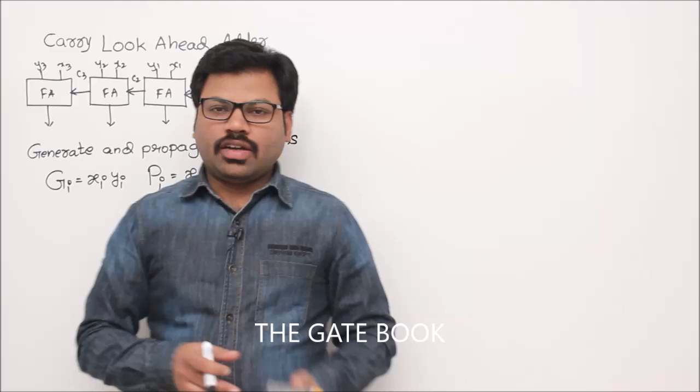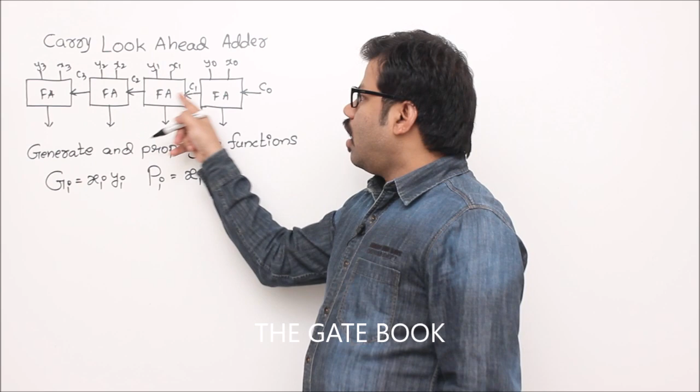Now we'll see carry look ahead adder, which is a faster adder than ripple adder. Okay, so we'll see that. What is the idea? In one line I will tell you. So in this ripple carry adder, first of all C0 has to be given to this full adder, then C1 comes, then C1 will be input for this full adder. So C1, X1, Y1 are going to be given to full adder, then C2 comes, then C2, X2, Y2 are going to generate C3 carry, then C3, X3, Y3 together are going to generate the final carry C4. That is a 4-bit ripple carry adder.

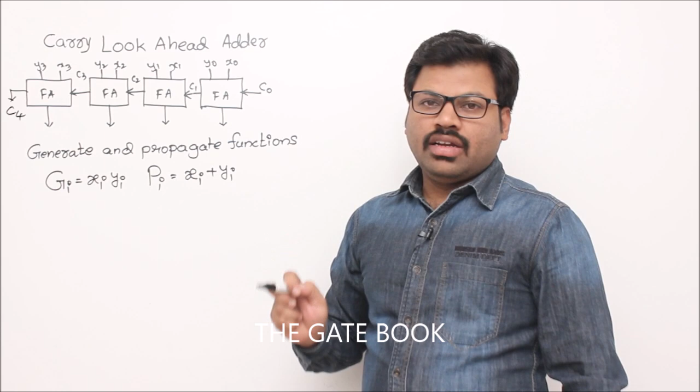But it takes a lot of time to get the results propagated to C4. So that's why, rather than waiting for C3, we are going to create a circuit directly for C4. How, you will see. So that is the idea about carry look ahead adder. In that we don't wait for C3; simultaneously we are going to create carry 1, carry 2, carry 3. So carry 3 is not going to wait for carry 2 now. Carry 2 is not going to wait for carry 1.

Sir, how? For that we have to design a circuit. So the logic for that circuit I am going to teach you. For that we are going to have two functions. One is generate, second one propagate. Don't worry about the names, they are not important for us. The idea is very simple. The generate is nothing but xi dot yi, where xi is the input. See here, x0, y0, x1, y1, x2, y2, x3, y3. So gi is nothing but product of two inputs, xi, yi, the ith bit. Now pi is nothing but sum of two inputs, xi plus yi, where i represents the ith bit.

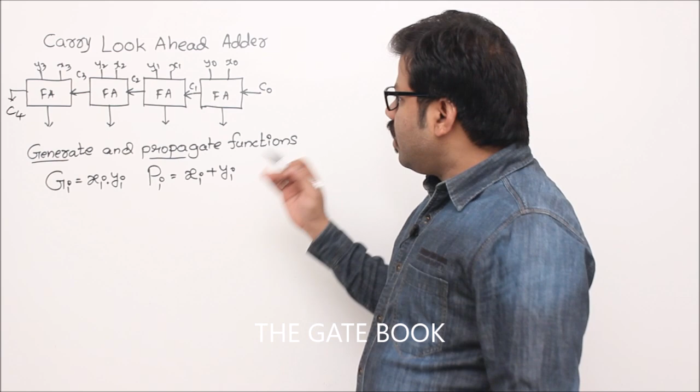Now you tell me what this full adder is doing. The second full adder is adding C1, X1, Y1, correct? Then what is the carry equation? The carry is C2, right? So this C2 is nothing but X1 dot Y1 plus C1 dot X1 plus C1 dot Y1. If you have doubt, then you should understand this one. For a full adder, when you have three inputs A, B, C, the carry equation is AB plus BC plus CA. I am using this result.

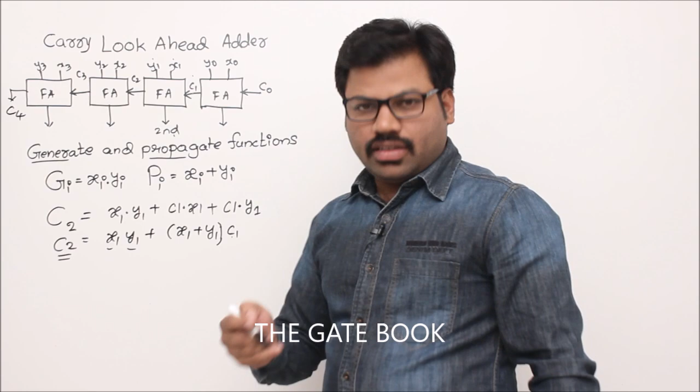Now the carry for this full adder is C2 equal to X1 Y1 plus X1 C1 plus C1 Y1. Understand? So now if I simplify it and take C1 common, it would become X1 Y1 plus X1 plus Y1 into C1, right? So the C2 equation is depending on C1. X1, Y1 are already available. Only C1 is not available. C1 comes after C0 is given to this full adder. That is the dependency. Now how I am going to overcome the dependency, I will tell you.

Similarly, try to observe C3's equation. What is C3? Carry out from the third full adder. So C3 equals the carry of C2, X2, Y2. The formula for that is X2 Y2 plus X2 C2 plus Y2 C2, correct? If I take C2 common, I can write it like this: X2 Y2 plus X2 plus Y2 into C2. Of course both are same.

Now if you observe one thing, X2 Y2 is nothing but Gi, that is G2, and xi plus yi is pi, so x2 plus y2 is p2. Then I can replace this with g2 plus p2 into c2. So what I want to say finally is, gi is available initially itself. Similarly pi is also always available because we have x1 y1, x2 y2, everything. So the gi function and pi function are available. The only thing unavailable is C2.

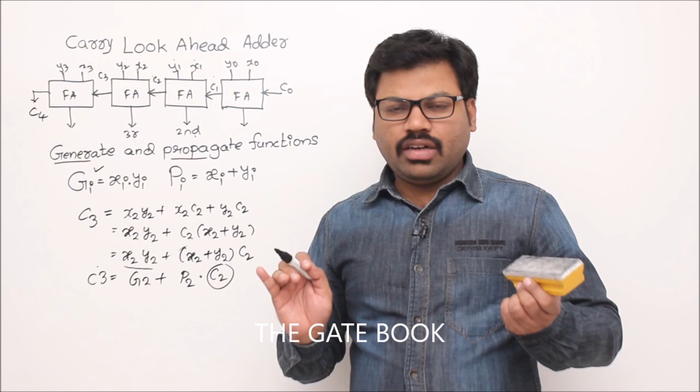For example, for C3, C2 is not available. Still we have a problem, right? So how to solve it? Sir, how do you eliminate C2? If you don't eliminate C2, then the problem will persist. That means again we have to wait for C2. For that, what we are going to do is like this.

First we write the equation for any Ci plus 1. So any Ci plus 1, with that observation, is nothing but, just recall, Gi plus Pi into Ci, right? So this is equation number 1. Now let's recall what is C3. Let's take i value 2.

C3 equal to G2 plus P2 C2. If I simplify it, G2 is nothing but x2 y2, plus P2 is nothing but x2 plus y2, into C2. It would be x2 y2 plus x2 c2 plus y2 c2, which is nothing but the carry from inputs x2 y2 c2. That is nothing but C3.

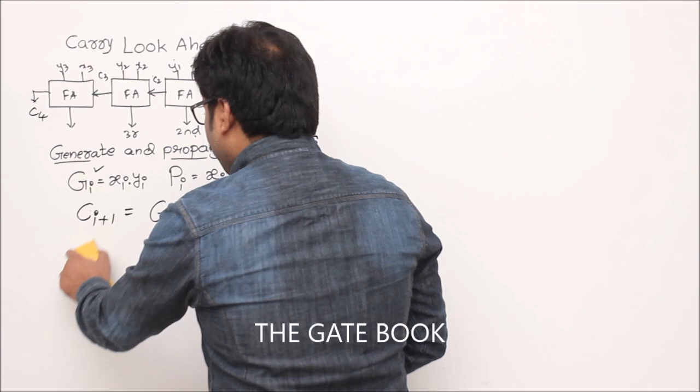Yes, perfectly right. So finally what I want to tell you is, this equation is going to help you to find out Ci plus 1 without Ci. How, sir? I will tell you. Try to write first C0. You slowly understand it. Of course C0 is already available. So what is C1? When i value 0, C1 equal to G0 plus P0 into C0. Assume that G0, P0 are available with us. So C0 also available.

Now we try to write the equation for C2 first. C2 equal to G1 plus P1 C1. But C1 is not available, sir. Then replace C1 with available things. C1 is already available because C0 is available, P0 is available. P0 is nothing but x0 plus y0, available. G0 is nothing but x0 y0, both are available. Then we can apply AND between them. So that's why we can calculate all. Let's postpone that calculation.

So here I remove C1 and write the equation for C1, which is G0 plus P0 C0. So that would become G1 plus P1 into C1, and C1 is nothing but G0 plus P0 C0. Let's simplify it. You get G1 plus P1 G0 plus P1 P0 C0. So finally C2 can be calculated using C0, right?

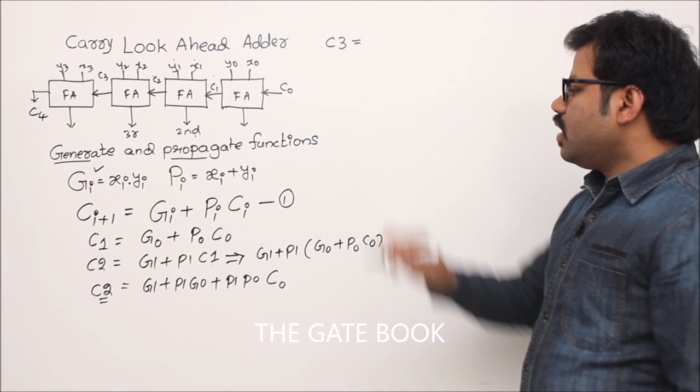Sir, but we want finally C4, right? What is the equation for C4? I will tell you. Let's begin with C3. What is the equation for C3? It is G2 plus P2 C2. We have G2 already, don't expand it. P2 we have already. So only C2 is not available. But C2 is nothing but, with respect to this one, let's substitute: G1 plus P1 G0 plus P1 P0 C0.

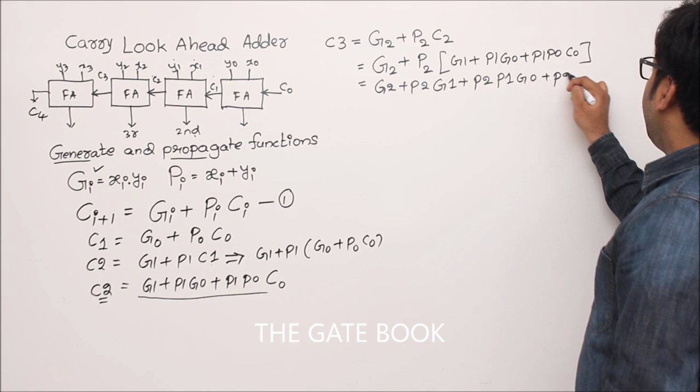So let's simplify it. You get G2 plus P2 G1 plus P2 P1 G0 plus P2 P1 P0 C0. So this is about C3. Now C4. C4 equal to G3 plus P3 C3. Let's expand it: G3 plus P3 into C3, and C3 is nothing but G2 plus P2 G1 plus P2 P1 G0 plus P2 P1 P0 C0.

So if I simplify it, you get G3 plus P3 G2 plus P3 P2 G1 plus P3 P2 P1 G0 plus P3 P2 P1 P0 C0. So finally, this carry C4 is nothing but this expression. This expression's beauty is, we already have G3. G3 is nothing but x3 dot y3, so using one AND gate I get x3 dot y3, not a problem.

Similarly, P3 is nothing but x3 plus y3, so using an OR gate I can get x3 plus y3. So within one gate level I get G3, P3, P2, everything. So this is one expression with some ANDs and some ORs. This entire expression can be realized with only two levels of gates. That is what I want to say: two levels of gates.

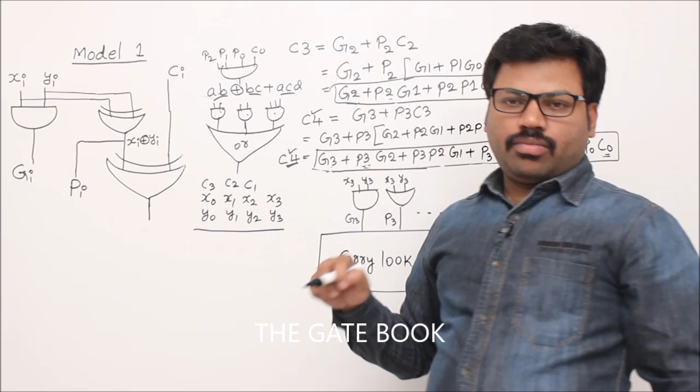Example, you see this P2, P1, P0, C0. How to realize it? You need a 4-pin AND gate. That is a problem. Okay, so what's the problem with multiple pins? I will tell you. At this moment, there should be a limit. Remember it. We can't have a 100-pin AND gate. So we can have at most 5 pin, 6 pin, not more than that. The reason we will see later.

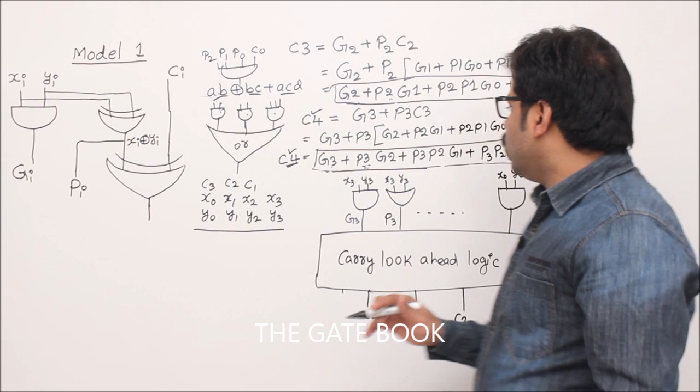At this moment, this equation can be realized with two levels of circuit. Remember it: one AND level, second one OR. Next, our final problem is: given x0, x1, x2, x3, y0, y1, y2, y3, we have to add them, right? Then x0, y0 has to be added. Here C0 is already available. C0, x0, y0 should be added using a full adder, correct?

Then you get the sum. That carry will be given here. Then we have to add these three using a full adder, right? Here one full adder, here one full adder, here one full adder. In that way. When you add these three, you get a carry, that is C2. C2, x2, y2 should be added. You get a carry, that is C3. Then we add them. You finally get the C4 carry.

Now the question: so far in the ripple carry adder, C3 was waiting for C2, C2 was waiting for C1, in that way. Now because of the circuitry, C4, C3, C2, everything will be available immediately once that circuit gives the output, correct? Now we will see when that circuit gives the output. Assume that we already have the C4, C3, C2, C1 outputs. C0 is already available. Then the only thing we have to compute now is the sum.

How to compute the sum when inputs are available? The formula is A XOR B XOR C, correct? Where A, B, C are the digits which we have to add to construct the sum. So, for example, I am going to create a circuit for A XOR B XOR C. I am showing here. A, B, C are just three variables. Don't worry about where they came from. I randomly took them.

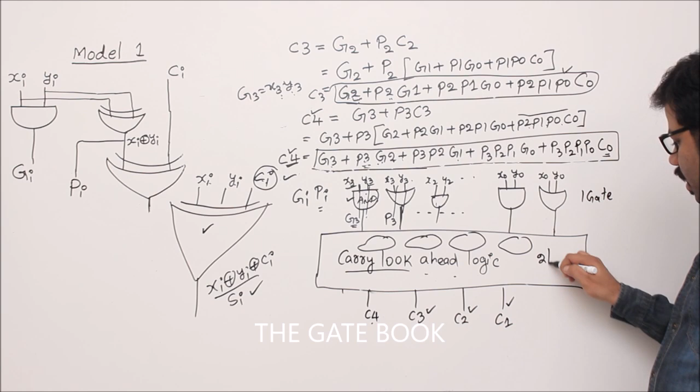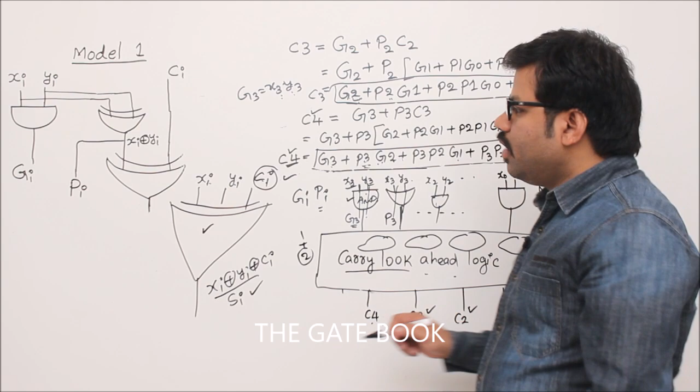So they are in two levels, right? They are all two-level circuits. First level AND, second level OR. After two levels, we are going to get the carries. That means after three levels, 1 plus 2, 3. After three levels, we are going to get all the carries. Once you have the carries, then what is the meaning of addition?

Any addition, recall: X3, X2, X1, X0, Y3, Y2, Y1, Y0. Addition is nothing but adding C0, X0, Y0, then you get a carry. Already we have the carries, so let me write them. So we have to add these 3 bits, these 3 bits, these 3 bits, these 3 bits. That means we have to find the sum now. That is the only thing remaining. We already have C0, C1, C2, C3. So how to do the sum? I already told you, right?

If you have an XOR gate with 3 inputs, then give Xi, Yi. You already have Xi, Yi. Then Ci we just constructed after 3 levels of propagation. That means after 3 levels of signal propagation, you get Ci. Once you get Ci, Xi XOR Yi XOR Ci will give you the answer. Not only one particular one. It is not one circuit I am saying. We need 4 of this kind of XOR, right?

For example, one for X3, Y3, C3. Similarly one for X2, Y2, C2. Similarly one for X1, Y1, C1, in that way. Hope you understand. So 4 circuits are required. All are working in parallel: here one circuit, here one circuit, here one circuit, here one circuit. All are going to provide the sum. Now don't ask me, sir, what about the final carry? That final carry is already generated by the circuit. You just simply take it.

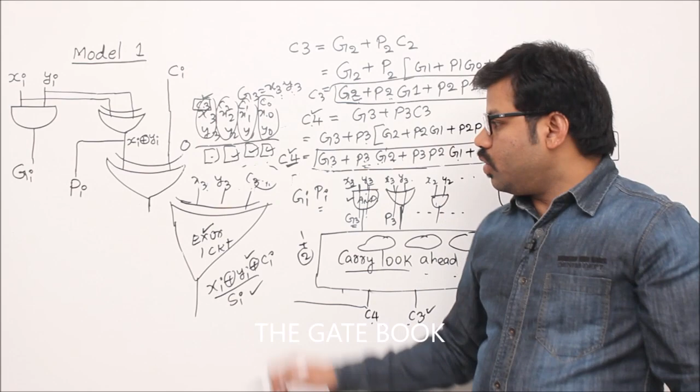Once you get it, when you apply this XOR gate, we are going to get the sum. So finally, you need 4 gate levels, correct? 4 gate level delay. Now remember one thing, sometimes in the GATE exam, they will clearly mention that you can't use a 3-input XOR gate. Then we can have 2-input XOR gates, but then you require 2 XOR gates. We will see that model also, the second model, okay.

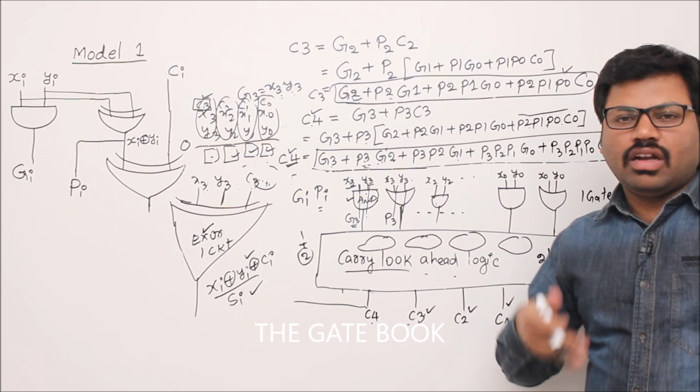Before going to the second model, I would like to add one modification to our equations. I will tell you, don't worry. So this is the idea. Finally you understood one idea. Now the modifications are a little bit easy for you. Now we'll see the modifications. Generally, Gi is what? Xi dot Yi, and Pi is Xi plus Yi, right. And Ci plus 1, any carry, is nothing but Gi plus Pi Ci, right.

Now the modification is, if I take Pi as Xi XOR Yi, you are going to get the same logic. Sir, why? How is Xi plus Yi equal to Xi XOR Yi? Not exactly like that, but what happens is the logic will become the same after substituting this Xi XOR Yi here. Okay, we will understand that slowly.

First of all, what is your problem? Where are you using this Gi and Pi? In carry equations, correct? Now I prove that instead of Xi plus Yi... because we know why this one is Pi, right? Why it is Xi plus Yi, you know that. So otherwise, let me show that again.

Ci plus 1 is Xi dot Yi plus Pi, which was Xi plus Yi, into Ci, correct? If you simplify, you get Xi Yi plus Xi Ci plus Yi Ci. This is a carry equation: AB plus BC plus CA, where A, B, C are the inputs and AB plus BC plus CA is a carry, right? Remember that. Now instead of Xi plus Yi, I am using Xi XOR Yi. Still you get the same thing. Why? We will see. Substitute and check it out.

Ci plus 1 equal to Gi. What I want to say is, in the place of Pi, you write Xi XOR Yi. Let's do that. It would be Xi dot Yi as it is, plus Pi, which is nothing but Xi XOR Yi, into Ci. Let me simplify. It would be Xi Yi plus... right, A XOR B is AB bar plus A bar B. So Xi XOR Yi is nothing but Xi Yi bar plus Xi bar Yi. Remember it, okay? Now let me substitute that.

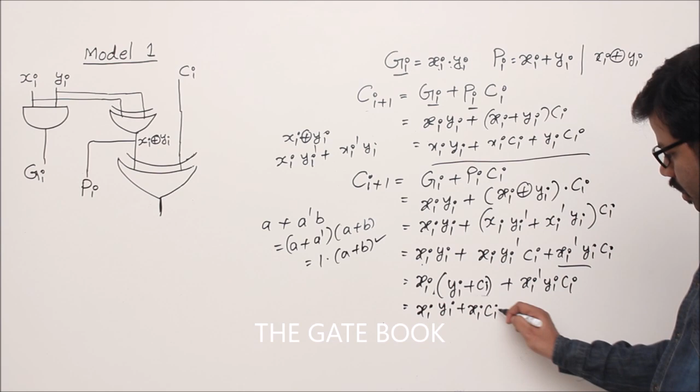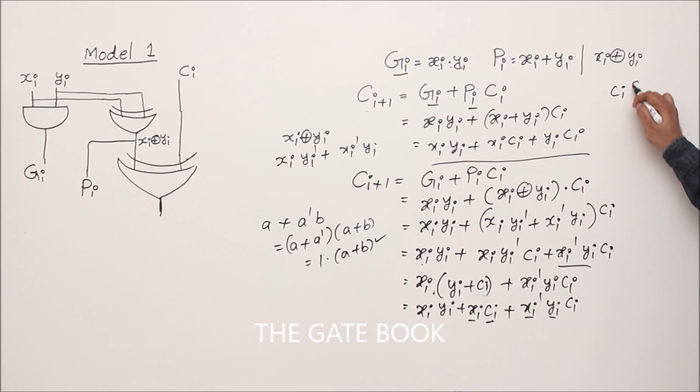Now let me multiply them. Xi dot Yi plus Xi Yi bar Ci plus Xi bar Yi Ci. Right. Now you see here you have Xi bar Yi Ci, and here you have Xi Ci, correct? I take Ci common. If I take Ci common, I show here: Ci into Xi plus Xi bar... I am taking these two terms with Ci common.

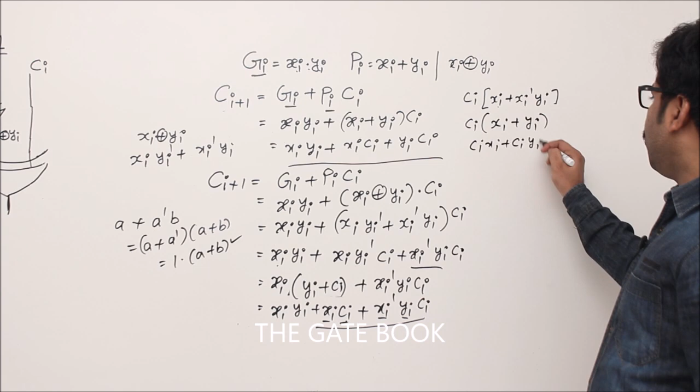Xi plus Xi bar Yi. Same formula: A plus A bar B equal to A plus B. So Xi plus Yi into Ci. If I simplify that, you get Ci Xi plus Ci Yi. Let me write it. So this part I am erasing. What I got? Ci Xi plus Ci Yi. So is it not again Xi Yi plus Xi Ci plus Yi Ci?

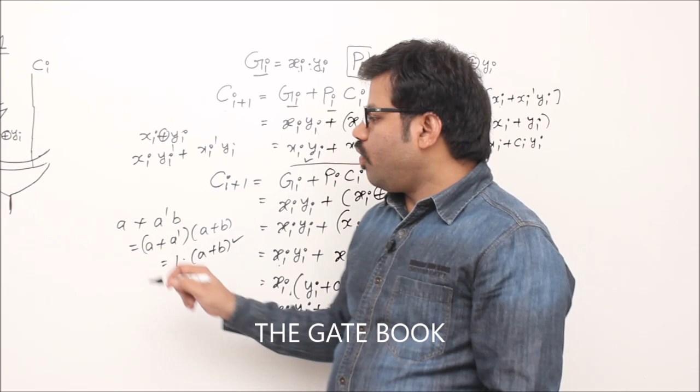This is nothing but the carry equation for Xi Yi Ci, correct? So here also the carry equation for Xi Yi Ci. Both are same. So from now onwards, safely, whenever you have Xi plus Yi, I can use Xi XOR Yi. Sir, why? I will tell you. To understand that, you should understand another circuit design. So far, whenever we had sum of Xi Yi Ci, we were using a 3-input XOR, right? Now we are going to use only 2-input XORs.

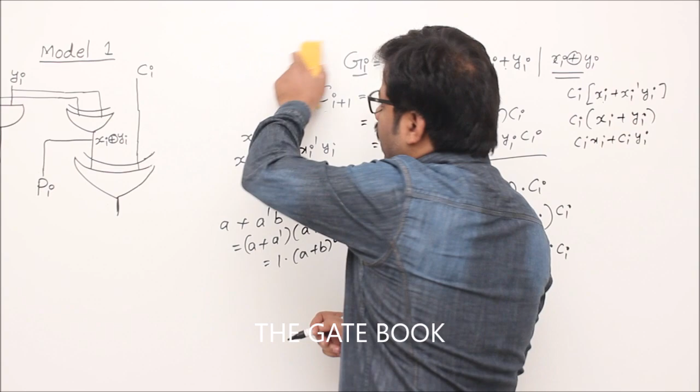Okay, just see that design. I will tell you the advantage of this design. First of all, you see, first step, we have to generate Gi, Pi. Then only we can connect these to the carry look ahead logic, right? So I'm talking about every Gi Pi: G0, P0, G1, P1, G2, P2, everything. Question number 1.

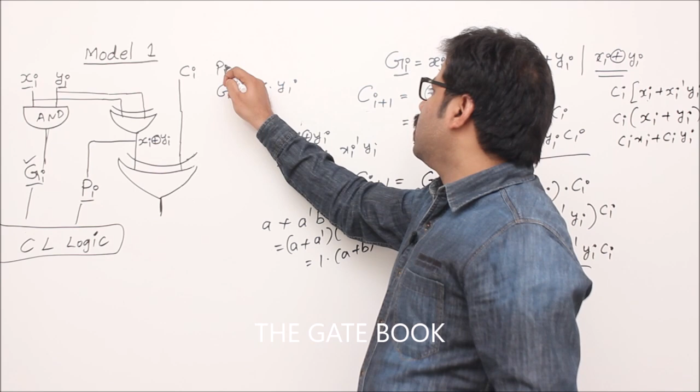Sir, what is Gi now? Gi is nothing but Xi dot Yi. Already you have Xi, Yi as inputs, no doubt, right? Then using the AND gate, we can get Xi dot Yi, which is nothing but Gi. Now we have to construct Pi. That is actually Xi plus Yi, but now we change the logic. Now Pi is Xi XOR Yi. If I use that, what is going to happen? You see, I take the Xi input and Yi input and connect them to a 2-input XOR.

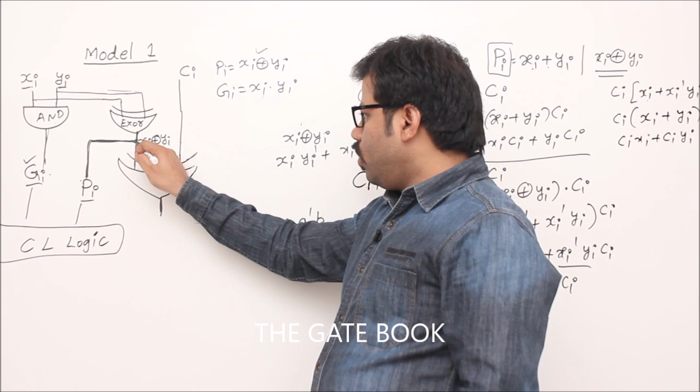Then we are going to get here xi XOR yi. If I take this cable, if I take signal from here, that would be what? xi XOR yi, of course Pi. Now this Gi, Pi got generated using one AND gate and one XOR circuit. The beauty is that XOR gate output is also connected to one more XOR gate along with Ci.

Don't ask me how to get Ci, already I taught you. From here you are going to get it, not only fixed Ci, all C0, C1, C2, C3, everything. So Ci we are going to get from here. Once you get it, then from here you get xi XOR yi. So what is our final goal? Only realizing sum, because this logic is generating carries.

Addition is nothing but generating sum bits and carry bits. Already carry bits got generated. Once the carry bit is generated, use that carry bit and get xi XOR yi from here. Apply one more XOR. We get xi XOR yi XOR ci. That is what we have to realize. Now in this model we are using only 2 input gates. That is one thing. Now circuitry is also reduced.

In the previous problem, we were using one AND gate for xi yi, one OR gate for xi plus yi, and a separate XOR gate. But here we are using one AND gate for xi yi, one XOR gate for creating xi XOR yi, and the same XOR gate's output we are using for Pi. In that way we are reusing and reducing the circuitry. That's why it is a better design.

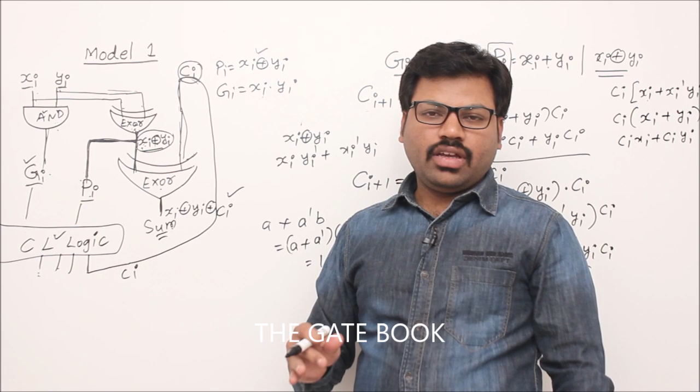In the GATE exam, if they ask a question, don't worry, they will tell you what kind of circuit they are using, or somehow you can guess it. They will tell you what type of gates we have to use. If they say only 2 input gates, you can go with this. If they say you can use 3 inputs, then you can go for that model. These are all different ideas.

Now what is the advantage if you compare with the previous one? I have all 2 pin gates. Most of the time we will be having only 2 pin gates. If that is the case, we have to go for this design. That model will not work. Whenever you have any 3 input XOR circuit, we can realize that with 2 input gates also.

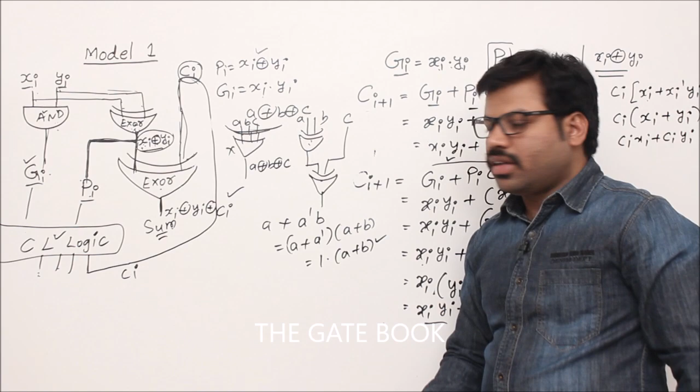How, sir? Example, your target is A XOR B XOR C. One design is give A, B, C to only one XOR circuit, and you get A XOR B XOR C. But let's say it is not allowed. Then you can go for first A XOR B, then take C and connect these two to one more XOR. How many gates are required? 2. Since that one has 3 input gates, if only 2 inputs are allowed, we will be going for this model.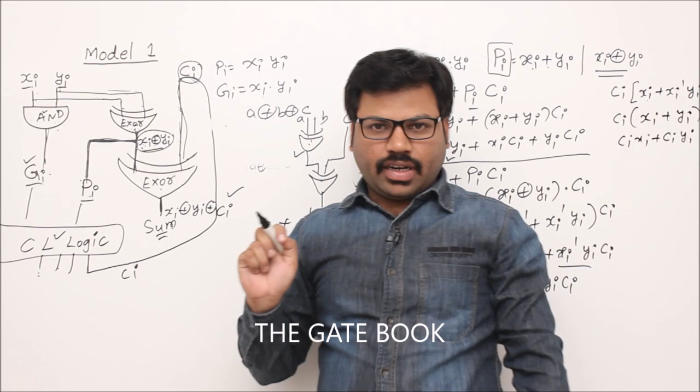When you go for this model, if you use xi plus yi instead of xi XOR yi, you will be wasting one more gate. Because if you use xi plus yi, for xi dot yi one AND gate is compulsory, for xi plus yi one OR gate is required, and these two for sum.

So finally, this is for Gi, this is for Pi, and these two XORs for sum: 1, 2, 3, 4, 4 gates. Now I am reducing these to 3 only. That is the only purpose we now use the formula Pi equal to Xi XOR Yi. Better design. Now we'll see the delay in this model.

What is the delay? When you start computation, first inputs will propagate through this AND gate, and the same inputs will propagate through this XOR gate. Once inputs propagate through those two gates, they generate Gi, Pi. Once you get Gi, Pi, we connect them to the CL logic.

So then that CL logic is going to give you the appropriate carry, right? Ci. So how much time will it take for you to get Ci? Simple. One AND gate delay, one XOR gate delay. Let's assume XOR and AND have the same delay. Then one gate delay. After one gate delay, you will come to the CL logic, carry look-ahead logic.

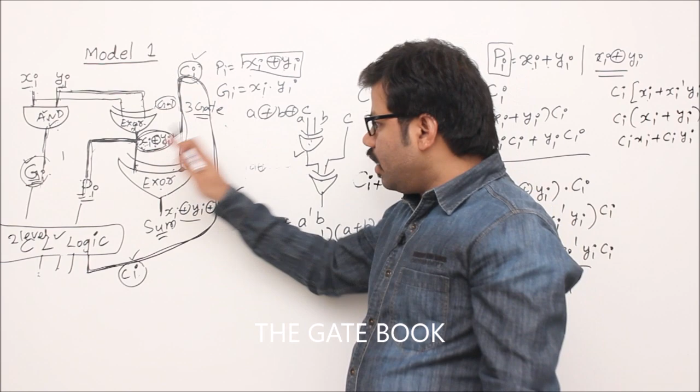Now that Xi XOR Yi is waiting for another partner. Who is that? Ci, who is going to come after 3 gate delays. So we don't add them, don't say 3 plus 1, because this 1 gate delay is a part of this 3 gate delay. So after 3 gate delays you are going to get the sum. Sorry, plus you have to count this XOR. 3 plus 1, 4. Here also 4 gate delays.

Let me summarize. Start. 1 AND gate delay, 1 XOR gate in parallel. Because of that, within 1 gate delay, Gi and Pi will be prepared. After that, there are 2 levels of logic here. Then 1 plus 2, 3. After 3 levels of delay you get the carry. Then Xi XOR Yi will be XORed with it to get the sum, one more gate delay. So 4 gate delays is the answer. In the previous problem also the same answer, right?

Now in the GATE exam, based on the question, we have to answer. But this is the foundation. Once you understand the foundation, you can solve any problem. Sometimes they say XOR gates are not allowed. Remember, generally an XOR gate will not have the same delay as an AND gate. If an AND gate has 1 gate delay, an XOR gate will have double delay, 2 gate delays. Of course it's only 1 gate, but the delay will be double. But in the problem they will mention it.

Why I'm giving this information is because when you have it, you will have better clarity. In reality, AND gates are faster than XOR gates. For example, if an AND gate has 1 nanosecond delay, XOR is going to have 2 or 3 nanoseconds. Second thing, in the GATE exam sometimes they say XOR gates are not available. Then how do we get XOR functionality? We can build XOR with AND and OR gates. For that you require 2 levels of gates.

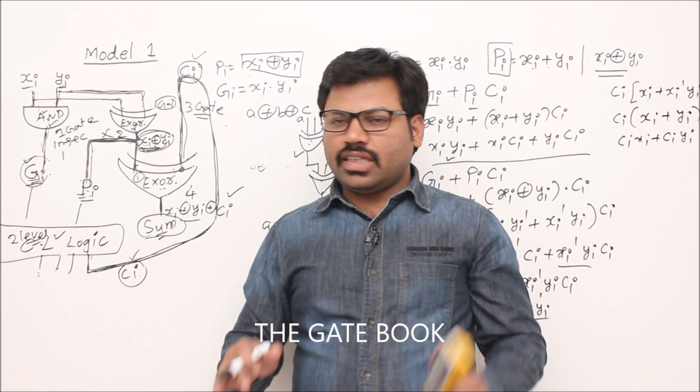You will be studying that in digital logic, so please prepare digital logic. In digital logic you have already studied how to implement XOR using NAND gates, or otherwise AND and OR. Use that logic. I don't want to mess things up at this moment, but XOR can be realized with AND and OR, and NAND, NOR. So use that, depending on the problem. If they don't mention anything, we directly use this idea. Okay, these are all the things.

End of the day, what I want to tell you is, in computer organization, once you have the foundation, now you understand one level of it. If you solve the problems, you will understand the remaining details. While solving problems, if you face difficulties, don't worry, that is part of the game. It's not like everyone who attends this lecture will solve every problem. Once you understand the concept, you have a strong foundation about carry look-ahead adders, correct?

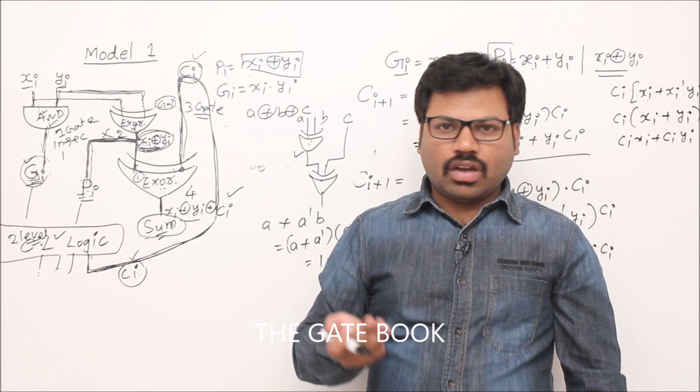After that, take the previous GATE problems and start solving. Apply your brain. Only then will you get a better rank, and you will really be solving the problems in the next exam, right? So practice is very important, remember it.